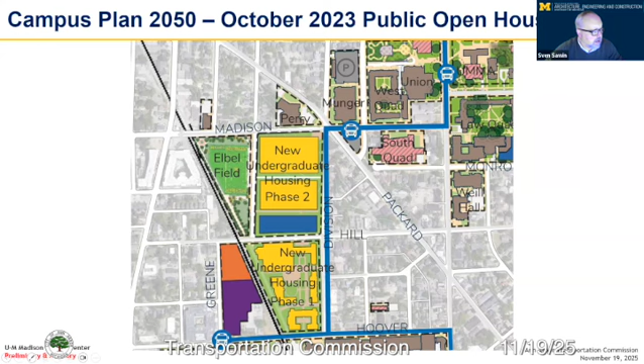You'll see labeled here the ideas of new undergraduate housing, shown in the yellow blocks. To the south near Hoover, that first phase of housing, which we're well under construction, should be opening next fall. We're projecting a second phase of housing between Hill Street and Madison. The blue lines on the street represent some of our key bus routing, thinking to the future and how we would be adjusting our bus routes with university busing to best serve this area. In this plan, we had identified a key bus node, a bus station on Madison near Packard and Thompson. I'm going to highlight that.

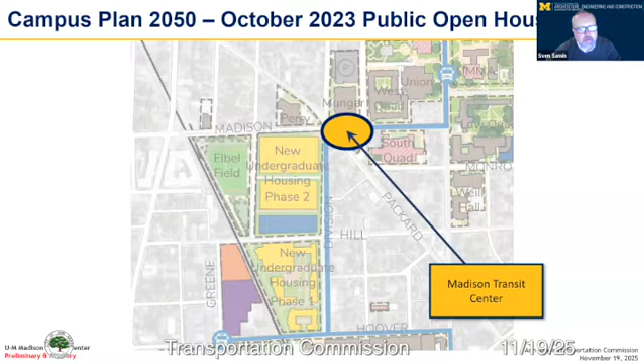This is what we had called out, and we began to think of this as the Madison Transit Center. We anticipated a transit center here to serve the high density of students living in the immediate vicinity, both in on-campus housing and in university housing, and recognizing all of the private student residences, apartments, and houses in the vicinity as well. So we called out this location, the idea of a transit center for our buses and to be used by AAATA buses as well.

So we have quite a concentration of students living in this vicinity, and these are students who need to move up through Central Campus, up to the medical center. Many of them will have classes on North Campus as well. So being able to serve these students with transit is incredibly important. We're very conscious of the community goal to reduce vehicle miles traveled by 50%. We feel very strongly that transit is one of our highest priorities to be able to move the volume of students and faculty and staff through campus and have them not in private vehicles, but taking advantage of our transit system. Especially for faculty and staff who come from out of town and may be parking in commuter parking at the perimeter of campus, being able to lean into our robust transit system to move them through campus.

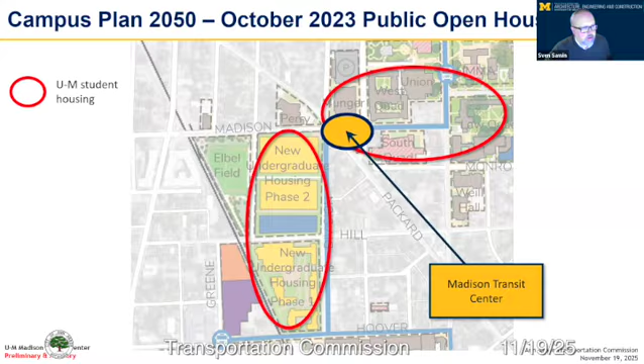So 2 years ago, in a meeting with city and U of M staff and leadership, we identified this as a key collaborative project to work on jointly to both support transit, but also to work closely with city staff to ensure all modes of travel would be able to move through this area safely. Not just transit, but non-motorized movements as well, being really critical, especially with the number of students living in this vicinity and walking and biking through this area.

As Melissa mentioned, we've held some joint workshops together with city staff to continue working through the design, which I'll share in a second, the concept design for the transit center. Working together, we had an opportunity to really factor in our shared priorities of safety and mobility.

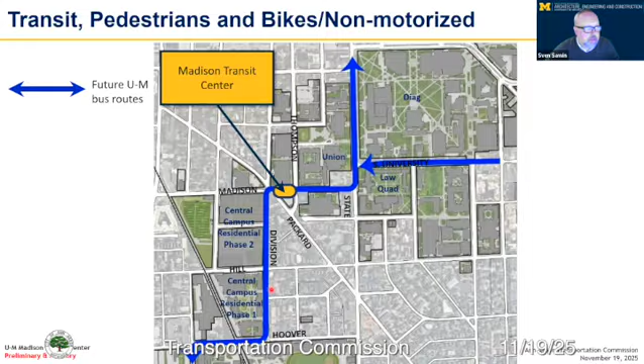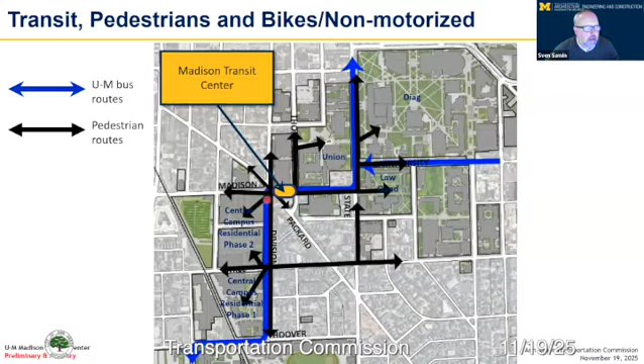So this is the overview, a high level of the placement of the transit center. Next, I'm going to take us down into a closer look at the transit center area, that zone around Madison, Packard, and Division. Drop us back down into there.

It's a complex intersection. The area we're talking about, really the heart of the transit center, is this short block of Madison between Packard and Thompson. This is a one-way eastbound short little block today, and this is the location where we focused a lot of the design and where we imagine the transit center operations would take place.

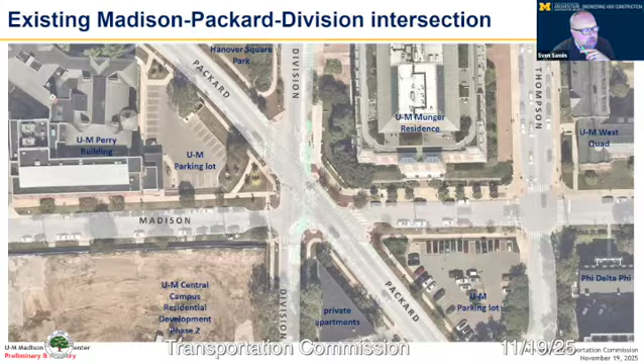I might jump forward, I have another couple images. So if we step back to existing conditions, we had mentioned the complexity of the existing intersection. There are a number of turn movements with this existing six-legged intersection. We've counted about 20 existing conflict points between where vehicles would be turning or making through movements and where pedestrians or bikes would be traveling - 20 different conflict points in the intersection today.

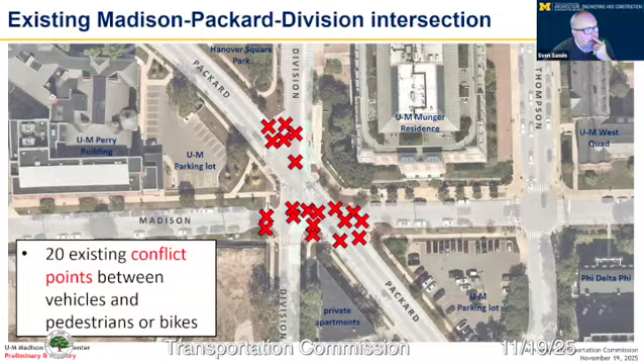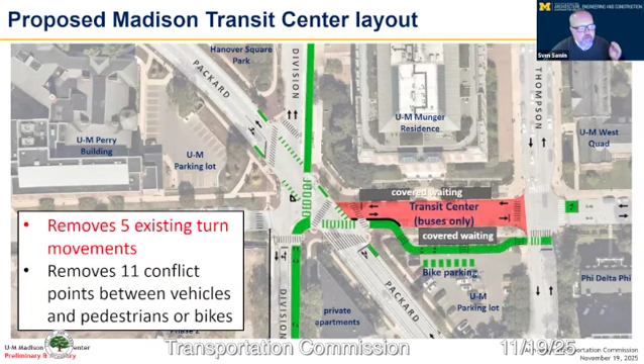I'm going to overlay the transit center concept again. As we think about the transit center, what we're proposing, working with city staff on how this would be executed, is actually removing 5 of those existing turn movements, which wouldn't make sense traveling into the transit center - you don't want private vehicles entering that - further simplifying intersection operations. Here I'm overlaying in red those 5 potential turn movements to be eliminated, and some of these are pretty obvious.

You don't want to be traveling from Packard into the transit center, making turns — those are movements you can make today, but with this being a transit-only section, you wouldn't have private vehicles doing that. Same thing coming up Division and making that 90-degree turn into Madison — that would be eliminated as well.

We also looked at, in discussion with city staff, eliminating northbound Division hooking hard to the right to travel southeast down Packard. It's probably not a heavy desire line anyway, but the opportunity to eliminate that movement reduces a few of those conflict points.

And then again, traveling northwest up Packard, that hard left turn onto Madison westbound — eliminating that turn movement removes a couple more conflict points. Overall, taking these movements out of the intersection operations simplifies it and enhances the safety of pedestrians, bikes, and other non-motorized modes, focusing on the movements really necessary for transit and vehicles.

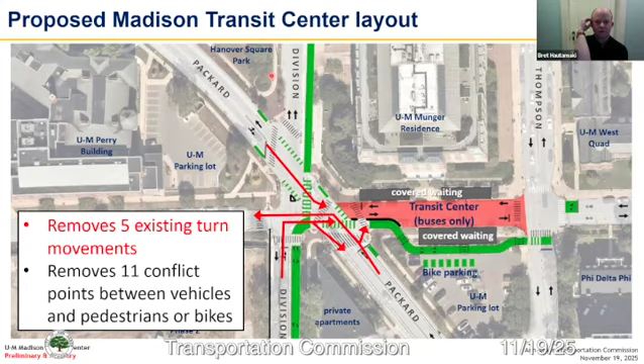Well, this is a very exciting thing. None of us really knew anything about this, none of the commissioners. So this is a ton of information that's very exciting, and it's nice to see all the work that you all have collaborated on to put together. So really appreciate you coming to us and showing us this.

Absolutely. Hey, Bret, this is Mike Rain. I work in government relations. Dharma would be disappointed if I didn't say anything at all during this meeting, but I just want to really emphasize the collaboration, especially with Cynthia and Nick. And then as soon as Melissa came on board, we'd been talking to them a long time, and then Melissa joined the staff and jumped right in. So we could not have done that without Cynthia, Nick, and Melissa. So we really appreciate the collaboration and want to thank them for that in front of the commission. So thanks for your time tonight as well. Thank you. Thanks, Mike.

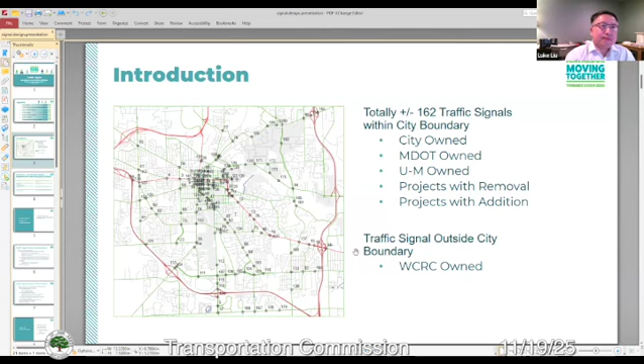The right column shows more detailed actions corresponding to each step of the TSM&O life cycle. For the planning stage, this is where capital projects are planned. The city recently went through another cycle to update the city's CIP, which is what the planning activity would look like. Programming corresponds to resource allocation and funding application to support traffic signal projects.

Design and implementation is the main topic of discussion tonight, about delivering traffic signal projects. Operations mainly talks about the city's signal shop and traffic operations center event operations. The last step of the life cycle is monitoring and improvement before the cycle restarts.

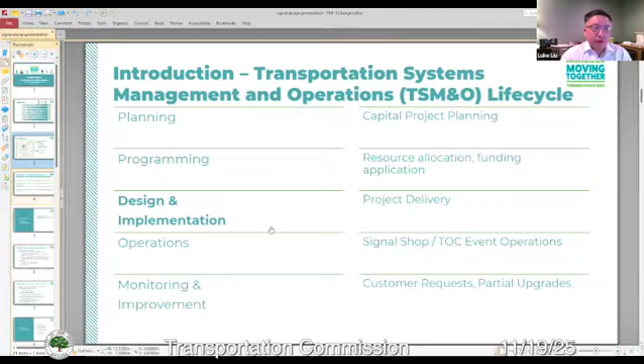This is where agencies would hear from customers regarding requests and seek opportunities to do either full upgrades or partial upgrades as part of the life cycle. Then we'll talk about policy, programming, and triggers that would kick off a traffic signal project.

For policy and programming, the city is moving together toward the Vision Zero Transportation Plan. There are many strategies among the 22 total strategies in the master plan, including strategies on investment and strategies addressing driver behavior.

There are also strategies involving adding additional bicycle routes to provide an all ages and abilities bicycle network, and intersection strategies focused on intersection safety for cyclists. There are also strategies talking about transit services to provide better reliability for transit service.

Toward the end of the collection of 22 strategies, the last two talk about adaptive traffic signal control technology and connected vehicle technology.

In previous Transportation Commission meetings, there was a discussion in early '24 about pedestrian service at signalized intersections, which is a more focused topic. Around that time, commission meetings also included updates about modifying the flashing yellow arrow.

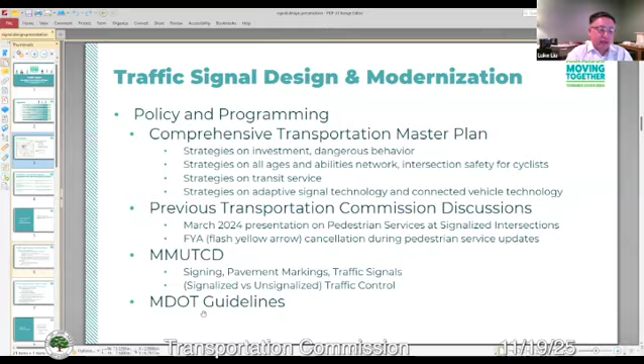Then we'll talk about triggers, or what would make traffic signal design or construction happen. The largest group of this would be capital improvement projects. There are three groups in the CIP that could potentially trigger this: streets and bridges, active transportation, and other infrastructure projects.

Another group of triggers would include development projects. These include private development projects like the Five Corners project, which will have some signal work involved for upgrading the intersection of Hoover and State.

The Broadway Park West project that's ongoing in the news involves a lot of talk about the pedestrian bridge. That project actually also includes a brand new traffic signal on Broadway with pedestrian crossing on Broadway.

Some public institution projects, like the Kahn Pavilion by UM, include a brand new traffic signal and intersection at Catherine and Zina Pitcher. Some public agency projects, like the city's own Wheeler Service Center, also trigger signal work.

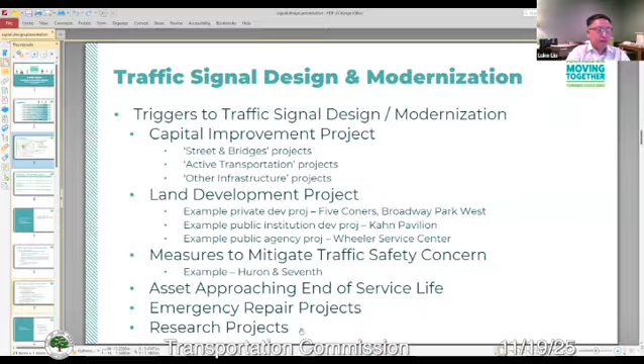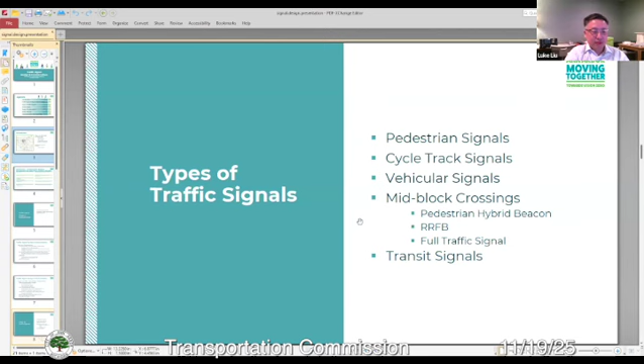All right, now we'll talk about different types of traffic signals. We'll go through the same items on the next page, so I'll just keep going.

There are pedestrian signal heads. The city is making its effort to upgrade all pedestrian signal heads to be the countdown type.

And bicycle signal heads - the city of Ann Arbor had the first installation in the state of Michigan, and the city is expanding bicycle signal installation at additional intersections.

Vehicle signal heads or faces are very familiar to all the users here. And then there's the pedestrian hybrid beacon.

The city used to have one location with this type of signal, at the intersection of Huron Street and 3rd and Chapin. I think it was around 2020 or 2021 that this type of signal was taken out, and the signal equipment was upgraded to be a full traffic signal for the intersection.

Both the pedestrian hybrid beacon and the RRFB, which is the next one, are more typically used for mid-block crossings, meaning non-motorized users cross a street in between two intersections. When these devices are used at an intersection, there might be potential confusion for drivers on the side street.

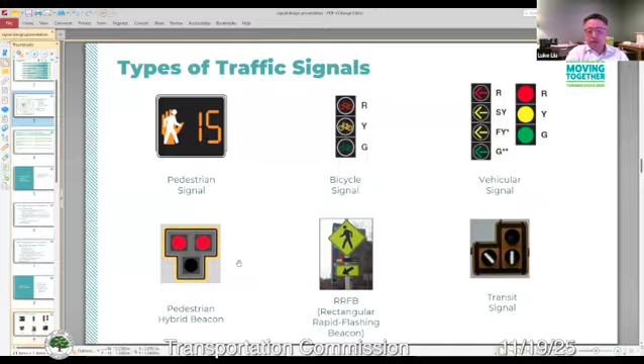The last type here is the transit signal, which, if I'm not mistaken, is again the first installation in the state to have an exclusive transit signal at an intersection. These are the vertical or diagonal bars indicating transit vehicles can proceed through the intersection, and the top signal face has a horizontal white bar that signifies the transit vehicle must stop and yield the right of way.

Briefly, the design steps for signal modernization. During the kickoff and scope verification, stakeholders are gathered to provide their input.

Then we move into base plan development. This starts with the location of the devices.

A very common type of upgrade is to change the signal layout from diagonal span to box span. Diagonal span means, for a typical intersection with 4 corners, there are only 2 upright poles at 2 opposite corners, stringing one wire across the diagonal of the box, and all traffic signals hang on that one wire. It's convenient for mounting the signal, but not the most ideal setup for providing intuitive observation to drivers.

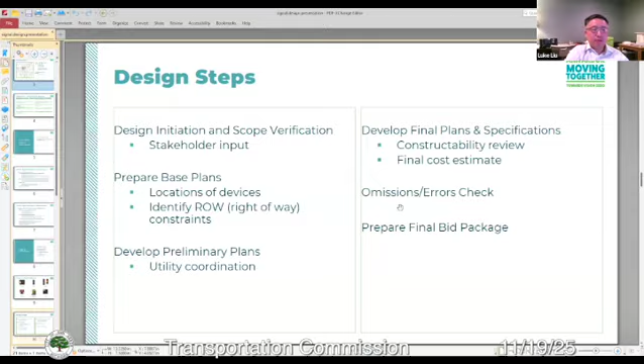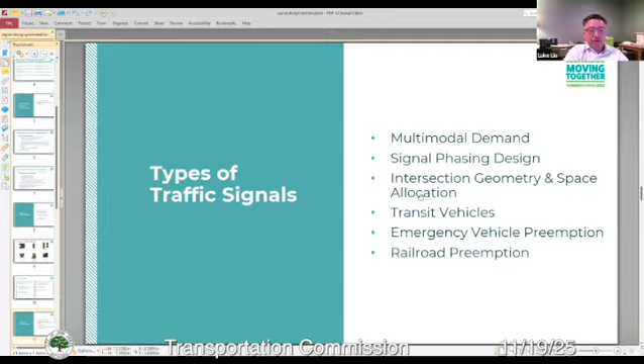Then we'll talk about different considerations in designing traffic signals. The first group is multimodal traffic demand: pedestrians, cyclists, vehicles, and how to separate the conflicts. Those are the main topics.

There are really a few intersections in the city where there is very high pedestrian demand. The city had a capital project a few years ago that involved a large number of traffic count collections. As part of that, 4 intersections were identified, 3 of them along State Street: State and William, State and North U, and State and Liberty. The fourth one is also along State, but not in that segment: State and Packard.

The 4 intersections observed really high pedestrian volumes, high enough to consider an exclusive pedestrian phase. Exclusive ped phase was actually deployed at the 3 intersections from William to Liberty, and it was in operation for a while. Eventually there were still enough complaints about users not being able to adapt to the exclusive ped phase that the operation was taken out, but it was a pretty extended period of time and a meaningful experiment of that deployment.

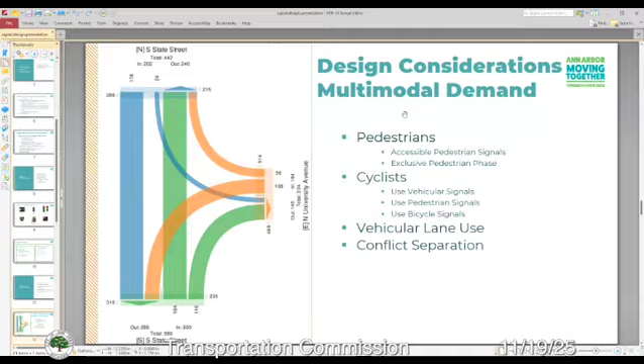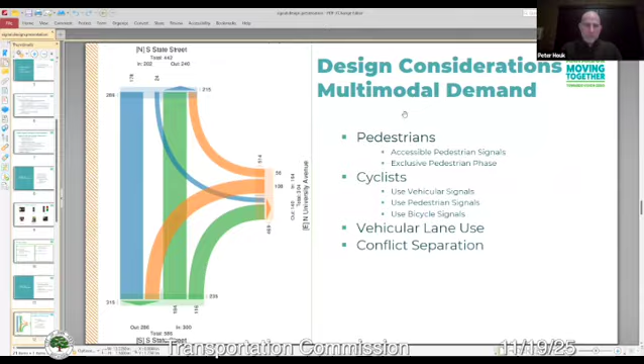Thank you. Pete? Hi, Luke. Wasn't that like decades ago though? I remember that from my youth. Wasn't it in the early 2000s that we tried that? I'm asking because maybe it's time to try it again — maybe it didn't work two decades ago, maybe it'll work now, I don't know. It's not that long ago, it was maybe during the second half of the pandemic, with the State and North U project. Okay, yeah, I think it was tried in like 2000 or 2001 also, is what I remember. So I guess we tried it again. Okay, thank you. Thank you.

Okay, I'll move on. Another consideration for signal design is signal phasing. Shown here on the screen is Miller and 7th, and this is the proposed design that will be deployed with the Miller project.

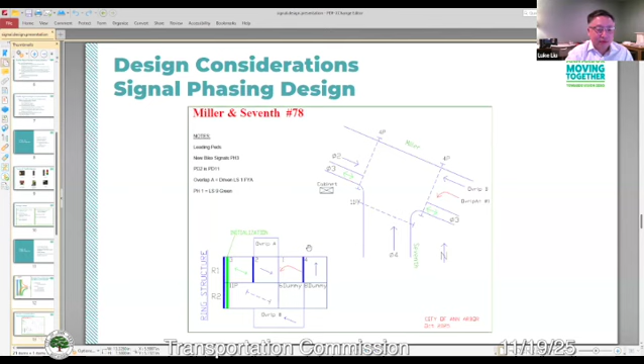Before the change, this intersection carried only 2 signal faces. With the addition of the bicycle signal, the operations became more complex, with more signal faces involved. This is what staff will need to handle to get ready for the new deployment.

We'll also continue to talk about 2 other examples. I guess I was lucky in picking Packard and Division - second time for everyone to see this intersection this evening, here on the left. I won't comment too much on that anymore. The one on the right is the intersection of Maple and Scio Church.

What I want to say about this intersection is that roughly 10 years ago, because of the skewness of the intersection, there was a new bus route being proposed. The bus movement would go southbound on Maple, making a sharp right-hand turn onto Scio Church. At that time, by checking the turning radius and turning template, it was quite challenging for the bus to complete the turning movement.

So what happened was city staff and staff from the bus agency brought 2 buses out here with the police department. The intersection was blocked off to normal traffic, during off-peak hours, and a field experiment was conducted to check the bus turning radius, or the envelope needed to accommodate the turning movement. The result was upgrades to the traffic signal for this particular movement, but also relocating the stop bar on the west leg.

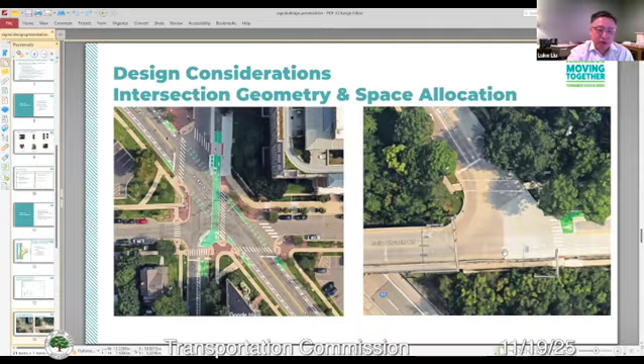Another group of considerations is transit vehicles. As the city is moving toward reduction in vehicle miles traveled, transit is becoming another mode that's going to be heavily relied upon. At the intersection of State and William, actually the block of State Street from Southview to William, the first bus exclusive lane will be constructed - or it's already there - and the signal is already functioning at the intersection of State and William to provide the transit signal display.

We covered the intersection of Maple and Scio Church as to how to accommodate buses at the intersection. Another example would be Catherine and Glen. There has been another crash there, I think it involved a fatality at the intersection, between a turning bus and a pedestrian. So there has been a traffic signal operations adjustment to separate the conflict between pedestrian movement and turning buses.

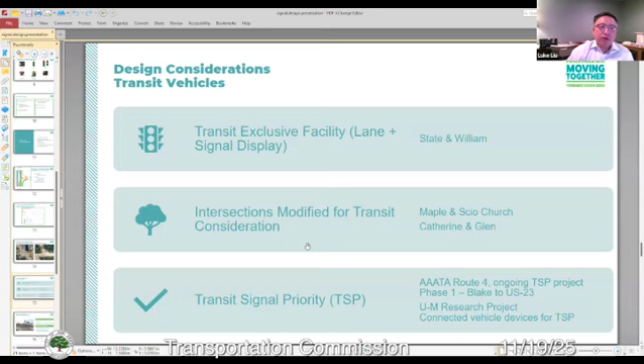MDOT is okay with that, with some special approval, because the software would require a version of the signal controller firmware which is not currently approved statewide. So the state department did give approval for the city to test the software and deploy TSP. It's an encouraging precedent.

The last type of design consideration here is emergency vehicle and rail preemption. Emergency vehicle preemption right now is primarily centered around two fire stations. Station 1 used to involve 3 intersections: 5th and Ann Street, 5th and Huron, and 4th and Huron. Recently, city staff expanded the scope of this preemption to include additional intersections further southbound on 5th Ave, including 5th and Washington and 5th and Liberty, to clear the queue and allow fire engines to respond faster. Fire Station 4, which is under construction right now, has had preemption there, and there will continue to be preemption at that intersection at Huron Parkway and Platt.

Railroad preemption covers 4 intersections: State Street and Stimson, Main Street and Madison, Liberty and First, and Barton and Plymouth Road. At some of these intersections, like State and Stimson, the railroad tracks go through the middle of the intersection. For the next two, Main Street and near Liberty and First, it crosses like 2 legs of the intersection. So it does have quite an impact on signal operations, and there are some unique settings to handle the signal and provide the right of way to the approaching train.

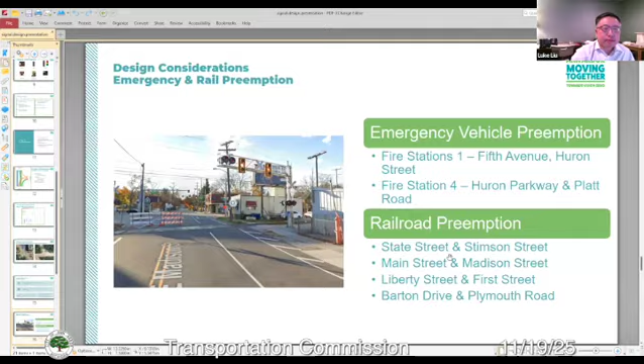So as part of adding the crosswalk, the Ravenna approach, that's the northbound approach, and the north leg is departing the intersection only. Additional signals were installed there, and there were also detection upgrades. This project was voiced by the city, and the city worked with MDOT on design and construction.

There's some discussion about ADA compliance here, not just this one intersection, but overall. Traditionally, an intersection could be ADA compliant without an accessible pedestrian signal. This is another item to pay attention to in the process of installing APS. The signal equipment itself is relatively affordable for adding APS. However, to be ADA compliant with APS, there needs to be a minimum separation between 2 accessible devices, as they would convey different messages verbally.

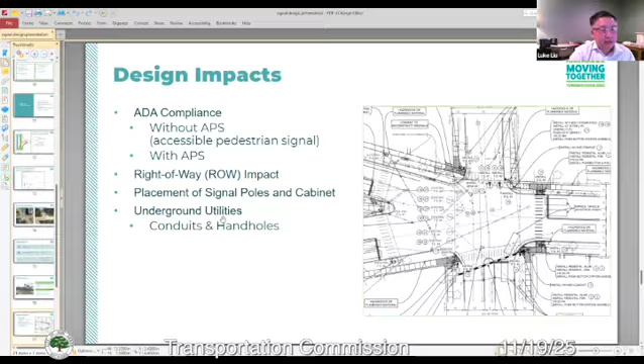Then we'll talk about the last segment of this presentation, data communication and operations. A very critical part of the infrastructure that's not very visible to users is fiber optic cables. The city of Ann Arbor has 100% fiber connection to all its traffic signals, which allowed for a lot of projects to be feasible, including the adaptive signal control, and research projects by the university, because that involves transmitting a lot of data back and forth.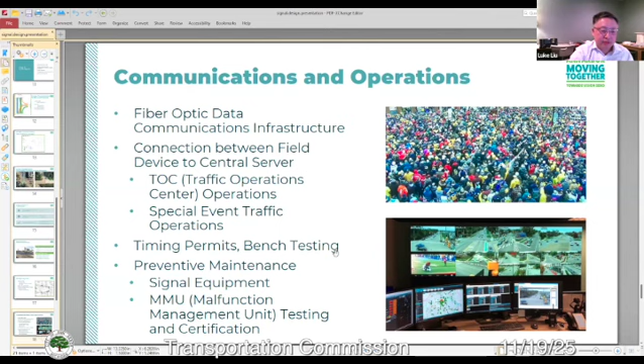Reliably. The city also provides preventive maintenance activities to signal equipment, and then certifies the malfunction management unit, which oversees the operations of each signal. In the case there is any conflict, this MMU will trigger the intersection to go into red flash to stay safe.

Here are two examples of special event operations. On the left is showing Ann Arbor Saline Road during post-game operations. This is maybe the last one remaining in the state where all lanes on Ann Arbor Saline are converted to one-way operations to allow faster travel for visitors to go home.

The picture on the right side is showing the same, similarly post-game, but this is on Main Street near Packard and William area, where users are trying to go home by going through downtown.

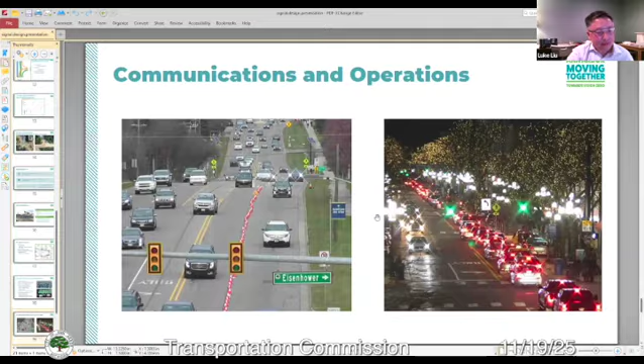The city is also conducting a near miss analytics project. This one is using the existing GridSmart detection cameras at intersections, not all intersections, but roughly around 50 or 60 intersections with the equipment. Making use of the existing resource in an attempt to expand the safety database to include near-miss events to explore mitigation measures before

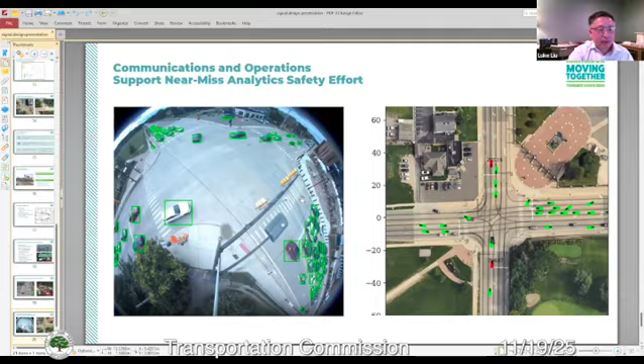crashes would happen. All right, this is the last slide with questions and answers.

If there's any questions, we'll dig as deep as we can, as the picture on the right. And if you ask what's showing on the left side, it's about the ridiculous amount of handholes on here. This is not in the city, it's just one of the hazards. I was traveling on vacation, I saw this, and I would not name where this is at.

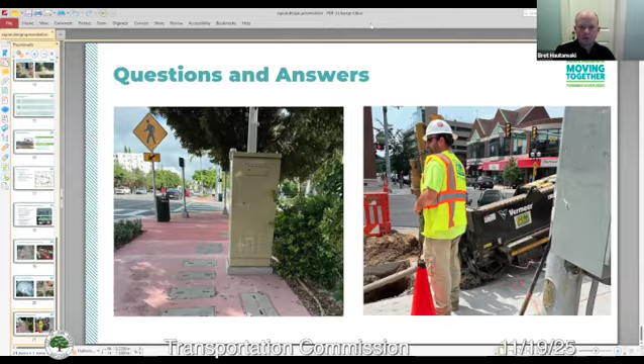All right, thanks again Luke for coming by. It's always good to see you—hopefully we see you again sometime soon. Thanks a lot for this, it's provided a lot of good background and answered some questions people have been having for a while. Thanks again. Thank you, have a good evening.

Thanks. Next up, the last information topic for tonight is our annual safety update. Cynthia?

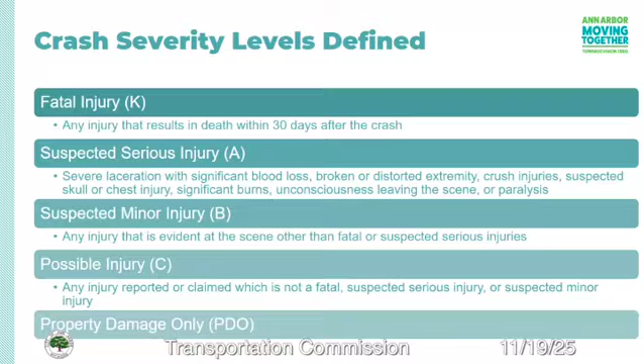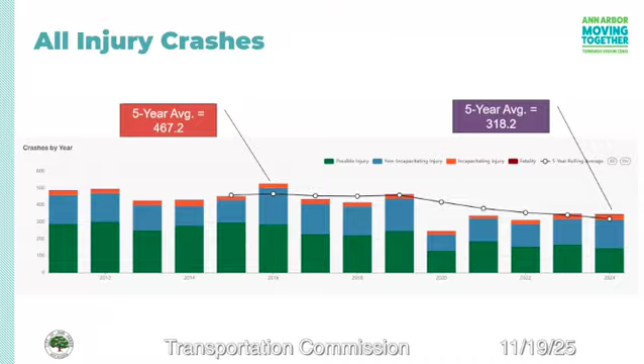Our next slide shows a graph of all suspected serious injury and fatal crashes reported for 2011 through 2024. As before, this graph is taken from the city's website and displays crashes reported annually as well as the 5-year rolling average.

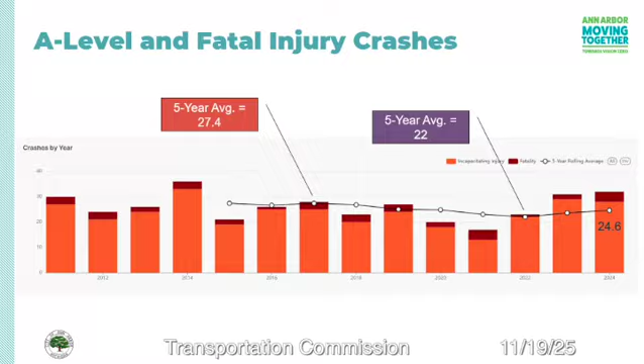Unfortunately, these trends are consistent with the national safety conversation about why more people are dying and being seriously injured on our streets. The answer to the question is complex and involves many factors, including more driving, which is referred to as the post-pandemic rebound, larger and heavier vehicles, and more risky or aggressive behavior. The national conversation is consistent with the dangerous behaviors we continue to see in our own community. Let's consider those behaviors.

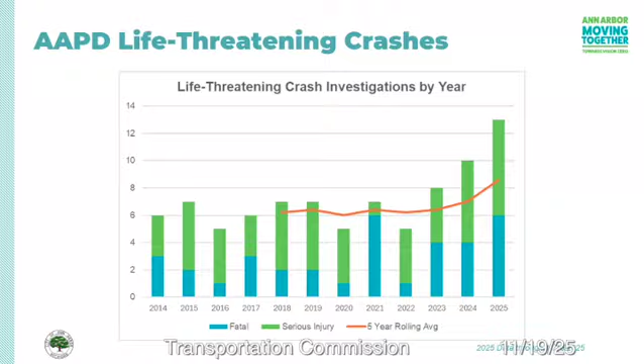These behaviors continue to be significant contributors to the life-threatening crashes our community experiences, which is significant because the difficult truth is that engineering can only influence people who are behaving within the bounds of normal expectations. It cannot stop a person from choosing to drive drunk or high. It cannot keep someone from traveling over 80 miles per hour on a street with a design speed of 35 miles per hour. It cannot force someone from blowing through an intersection with all the appropriate signs, markings, and signals in place.

When we look closely at the most severe crashes, the ones that leave families forever changed, we find that human behavior is often a determining factor. This is not about blame. This is about reality established by the data.